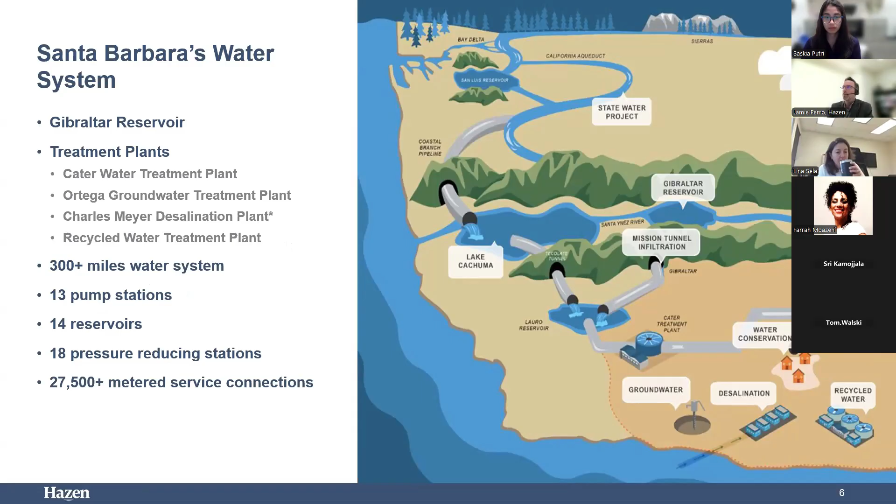So there's some complexities there. But they also have a recycled water treatment plant, which is what that picture I shared with you at the beginning, the El Estero Water Reclamation Center. They manage 300 miles of water system, 13 pump stations, 14 reservoirs, pressure reducing valves, and over 27,000 metered service connections. So the master plan, this is just a brief overview of what we are working on with them.

And this is the key here I want to highlight: this is a 10-year plan with a 30-year outlook. So Santa Barbara has said, give us a list of energy capital projects to implement over the next 10 years while thinking about the next 30 years.

And had Douglas given you his presentation first, that concept would have had a little bit more context around it for today. I know you're all aware of this, but how do you predict what's going on in the energy sector, even in the next 10 years, much less the next 30?

What does that mean from a delivery perspective for a client? I'm an engineering consultant. We have to deliver recommendations, not just ideas. We have to say, go build this thing in the next few years. So how do I make sure that I'm not going to be looked at as a team 5 years, 10 years down the road, saying, why did they tell us to do that? So it's very tricky, and there's a lot of agencies in the neighborhood looking at how Santa Barbara is proceeding with this project and others.

So starting from the bottom, we started with an energy benchmark baseline. How and where are you using energy? What are the flexible load opportunities? What is that market potential energy cost? How do we leverage existing CIPs, as I mentioned in the beginning?

And then actually integrate it with capital improvement programs across the board and develop that 10-year energy plan, the Water Resources Energy Master Plan. You'll see that acronym from here on out, WREMP, which I don't really like, but that's okay. We had proposed some really robust energy and data visualization strategies, which would then lead us along this 30-year path to best practices throughout the organization, staff and partner engagement, and then long-term optimization.

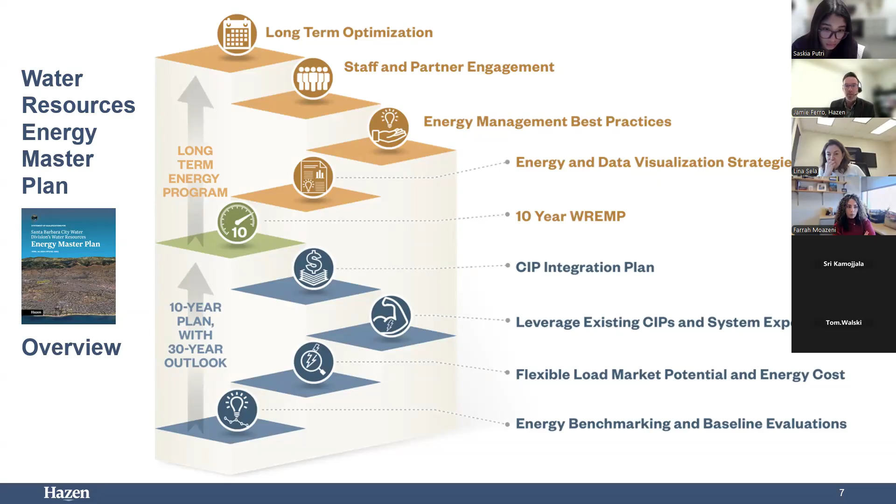So for 10 years, they've been exploring these opportunities from an academic perspective. They hired us, and this is actually the nexus of this, working with some of these researchers in an environment like this with Tom and Douglas in the Energy Management Committee of the AWWA. They reached out to us and said, can you help us develop a master plan around this energy? We've done all this research, now we want to implement. So that's where we're at.

The objectives are really simple. I want to walk through these 5 objectives: maximize financial and resilience benefits, expand renewable energy and battery energy storage systems — they've got some of these systems already — enhance energy resilience and reliability, integrate research initiatives, as I just mentioned, into their capital plans, and design an adaptive and dynamic plan.

And this is really one of those keys of meeting future uncertainties through this adaptive and dynamic nature. So the outcomes - I'll walk through briefly where we're at, and then we'll talk about some of the technical work.

Baseline energy use documentation - this is their first energy master plan, and they've done a lot of energy work, but really documenting where they are, where and how they use energy throughout this very complex system.

We then developed a Microsoft Power BI based dashboard for them to slice and dice the data, look historical, look at different rates, some counterfactuals about if we were on a different rate at this plant, how might that have affected overall cost in a period of time. At the moment, this is a static snapshot in time - basically taking that baseline information and putting it into a format where you can slice and dice, much how Power BI is intended to be used.

That's where it's at today. We're in the process of actually integrating some real-time upgrades into this dashboard right now, where they can regularly refresh the data and see near real-time energy use information throughout their system.

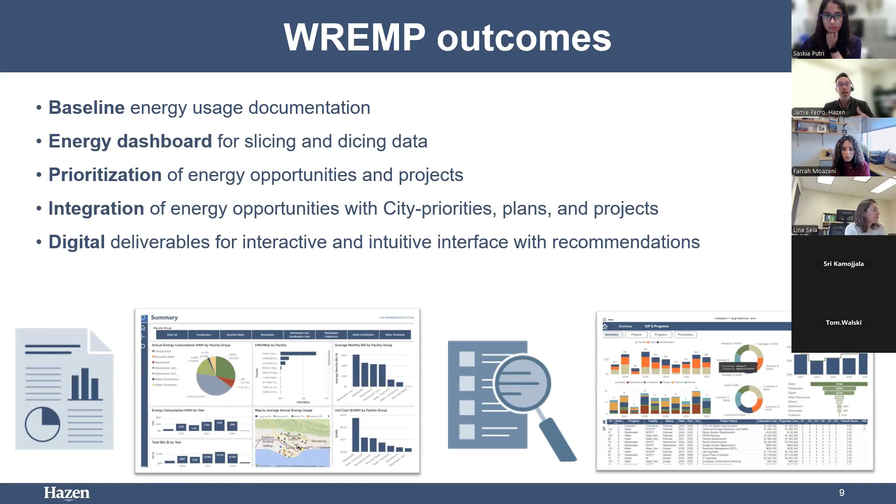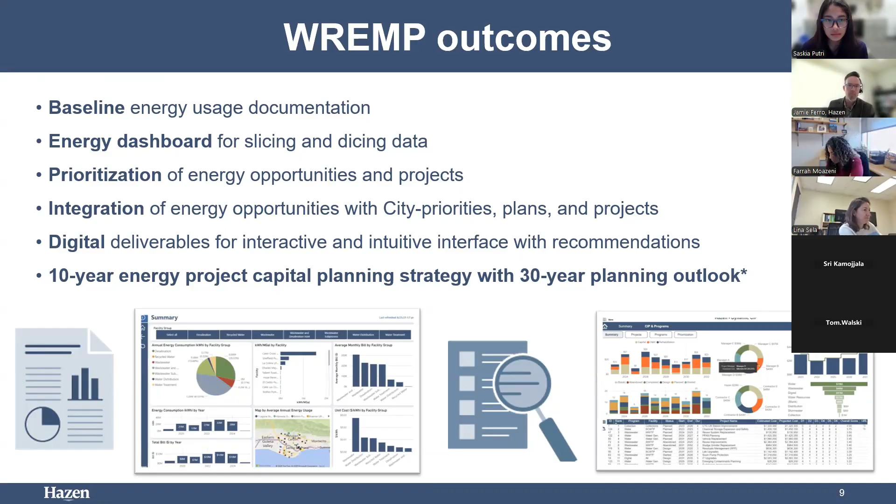I'll talk a little bit about that as I close up this case study. Ultimately, 10-year energy project planning strategy with a 30-year planning outlook - put an asterisk on there. We are in the last few months of wrapping up this entire plan, so we haven't quite given them that full deliverable yet. What are the projects we're looking at?

What are the priority opportunities? There's 87 individual energy projects that we have evaluated throughout the utility, ranging from energy efficiency projects, self-generation to load management strategies - 87, 86 projects. How do you prioritize those projects, and how do you make sure that you're really driving towards biggest bang for your buck implementation work?

We prioritize a couple of areas. The key here - you'll notice at the bottom right of my screen, the desal and the recycle water facility are on the same property, separated by a street, but on the same meter. So obviously there's a lot of opportunity there for load flexibility and coordinated operation of both desal and water resources recovery facility.

Coordinate the use of those, optimize the performance of the batteries that are on the system. We need to separate the load from each of these two facilities, but how do you time when and how some of the implementation, some of the operations of each of these facilities actually pulls load from the grid.

And I'd like to just note that one of the researchers has just joined us. He's been really instrumental in supporting this client, this city, for many years in his role at Stanford. So hello, Akshay, hope you're doing well, man.

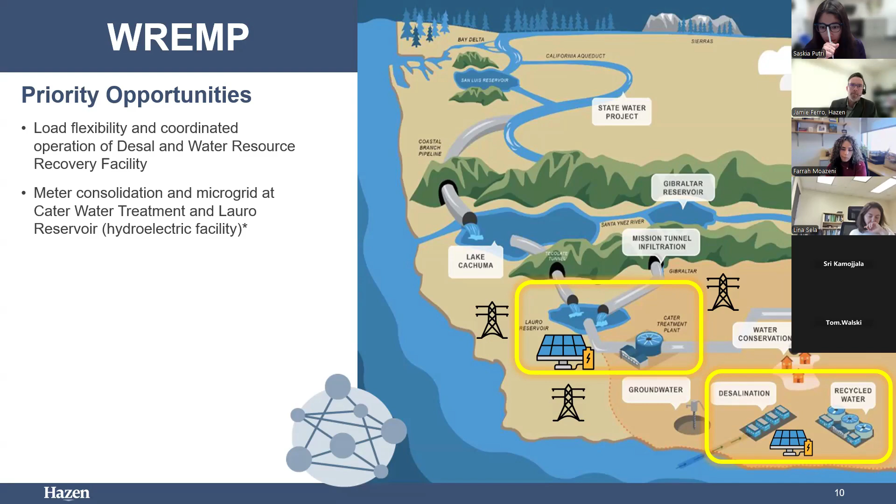So how do we think about all of these opportunities there, and really, do we consolidate all those meters into one? They've considered floating solar over the years. So really there's a big opportunity with this treatment system to optimize the performance of the system on the grid.

And then a couple other items at the wastewater treatment plant - a comprehensive biosolids and energy strategic plan. There's aeration improvements in there. And then piloting right now a wastewater influent equalization and secondary effluent return pump optimization strategy - that is a mouthful, I didn't realize that one bullet was going to be so hard to say.

The idea is thinking about when you can't really control what comes into a wastewater plant, and when you can. In this case, we've seen a lot of water conservation in the area, so they have very high strength sewage, but actually quite a bit of capacity within their system hydraulically.

So what we're working on with them right now is how do you use that water system, from a loading perspective, to manage the load, not the hydraulics, and use the hydraulics of the system as essentially a thermal battery. We could time some of those recirculation strategies.

We can actually back up the collection system while keeping that sewage fresh through mixing and bioaugmentation strategies, and figure out when is that load going to hit the blowers, which is where the real energy load at that treatment plant is. So we're working on some of those strategies, and how might that be coordinated with the battery or with the other existing loads on site?

The final piece of work really has come out of years of Stanford research, focusing on targeted leak loss repair and pump sequencing reservoir control strategies. So if we know the energy intensity of the system, and we know that most water agencies, including Santa Barbara, are systematically repairing leaks in their system, where do we focus our efforts on existing leak repair strategies?

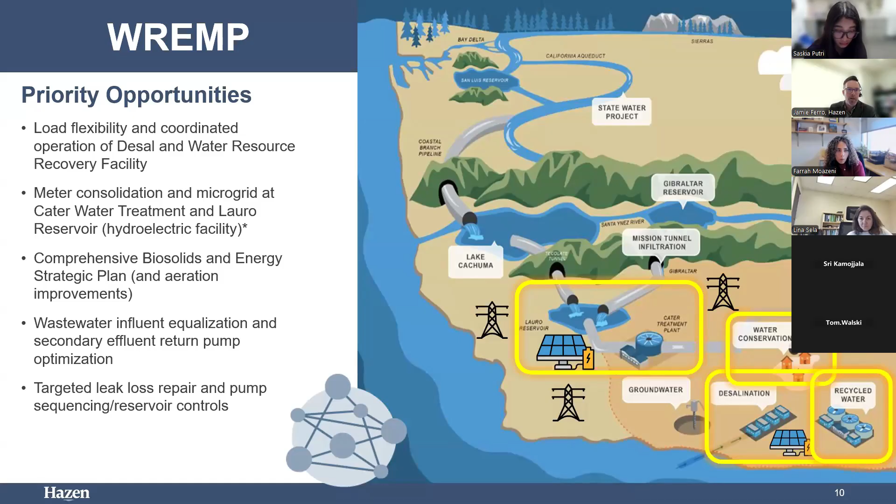Target those where you have high energy intensity and high flexibility, both in the pumping and the targeted leak repair. So we ended up presenting this multi-criteria decision analysis framework where for each project, we could think about the economics, the return on investment of an energy project just from a financial perspective, but there's other non-monetary benefits to each one of these projects.

So we developed this criteria ranking strategy where you've got different scores for each of these criteria, and then a weighting that is attached to each one of these criteria, so that each one of the utilities might have slightly different weights for the different criteria. And the goal is to score each one of these measures.

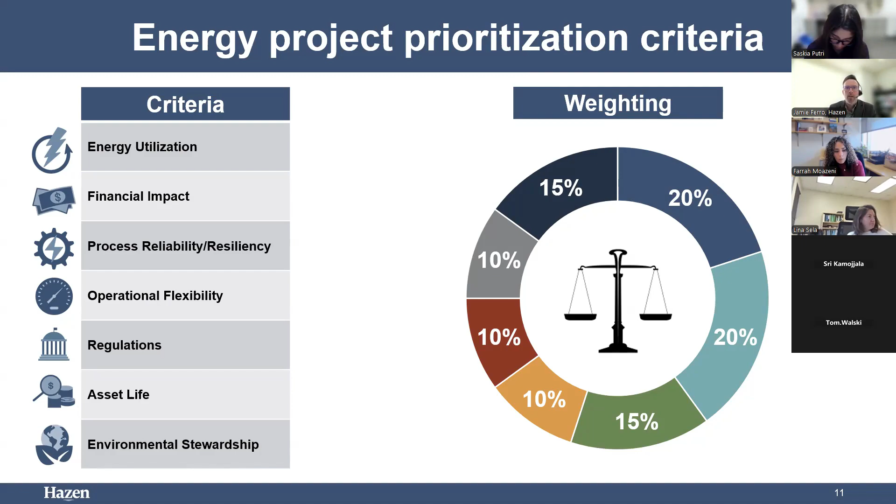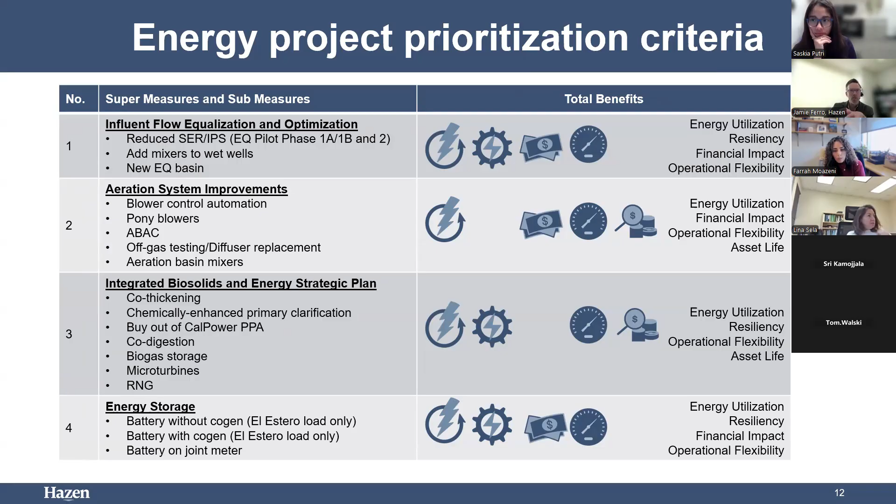So any of these capital priorities may have a very significant impact on energy use and time of use of energy and the grid. And so we want to make sure that we are working together with the city to time the implementation of these strategies in a way that really makes these projects make the most sense.

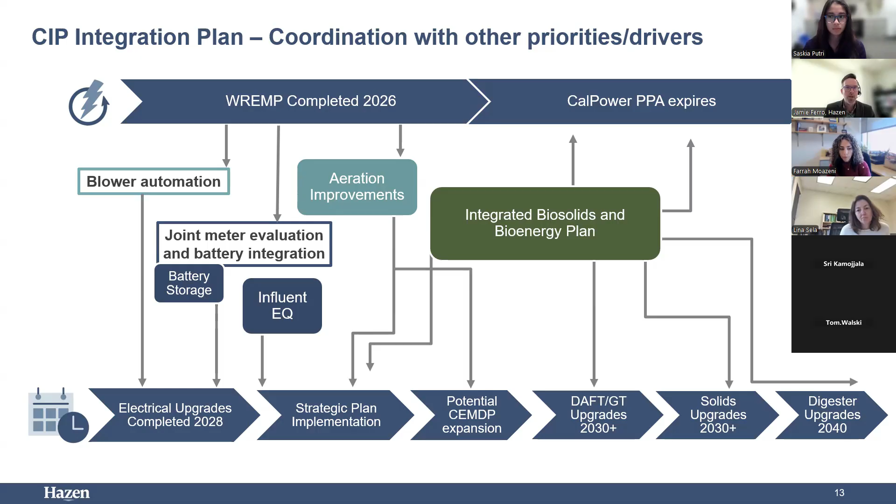At the end of the day, do we deliver a big document that can sit on a desk or on a bookshelf and collect cobwebs? Typically, this is how our industry has delivered energy master plans. Even the word master plan is out of fashion these days.

We have transitioned to calling them energy management plans instead of energy master plans. But traditionally, a master plan is a big document with all the technical memos and all the ideas. And the moment you publish it, just like a new car, you drive it off the lot, it loses value because the real-time conditions are changing all around us.

Our approach is to develop an integrated energy plan that ties all of these things together, considers these external factors, and ultimately delivers an actionable, intuitive roadmap of how these projects and capital priorities fit together. So that was the Santa Barbara case study, right on time.

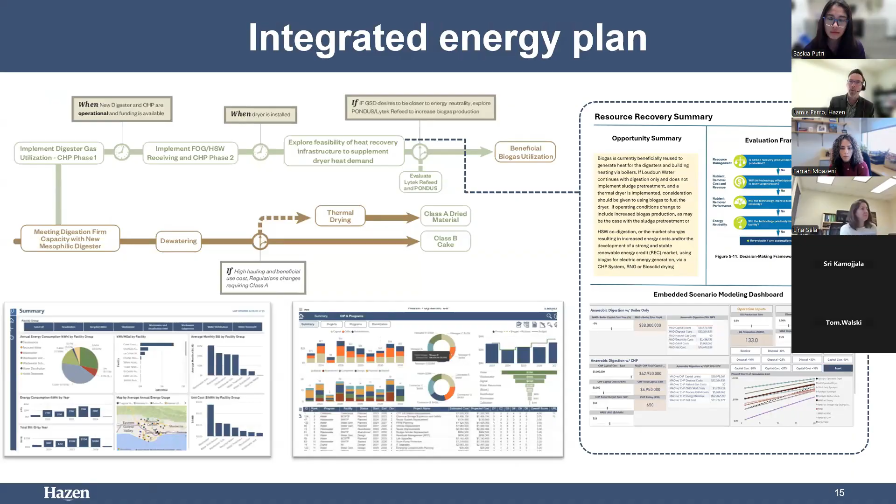I've got about 15 minutes to jump into the next case study, and hopefully we'll be able to get Douglas to give us that overarching context, and then we can have some discussions about these projects.

South Coast Water District here in my neighborhood. This is actually near and dear to my heart. I've known about this project for over 15 years. This project has been on the books, contemplated for nearly 27 years.

I'll give you a brief overview of the project, talk about some of the challenges. We'll describe the energy requirements, the energy intensity requirements of this desal system, talk about the opportunities, and I think I'll leave you with a couple of resources.

It's worth noting, as I said at the beginning, this is a progressive design, build, own, operate, maintain procurement. We call that DBOOM. It's like a progressive design build with a few other tweaks to it. So the Doheny Desal partners will actually own and operate this system, financed by the public utility, for a period of 20 years, until we transfer that ownership back over to South Coast Water District and their partners. So there's lots riding on this project, and a lot of risk sharing between this progressive design build strategy with the client.

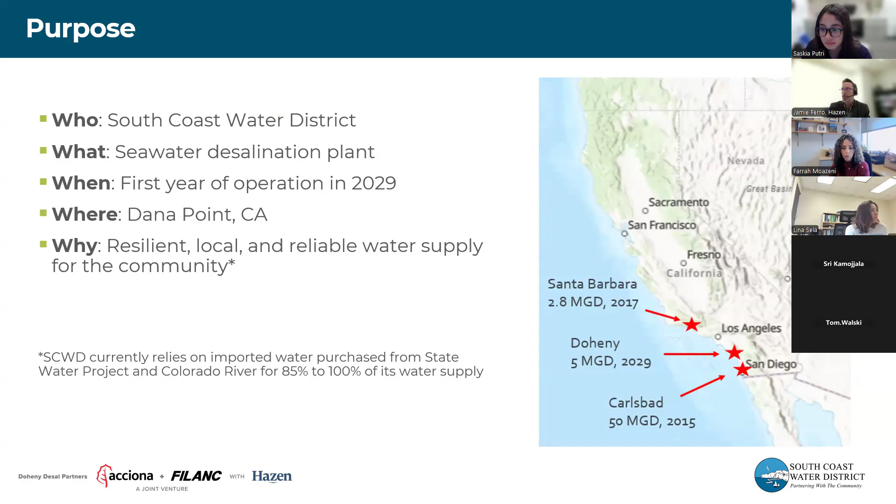The challenges we face on this project are pretty significant. As you know, desal is very energy intensive, you have to push water through a membrane. At the same time, the California Coastal Commission has put a special condition on issuing the coastal zone permit: the energy supply must be net carbon neutral.

Wow, that's going to be a tough one in that area, and I'll show you the site a little bit. The site is very constrained. We can't build a bunch of solar, we can't build a bunch of battery banks on site. We will, as you'll see, we have designed those solutions, but we can't offset the entire load on site.

The grid is constrained as well in the area. So it is not feasible, or economically feasible, to import power from distant solar farms, utility scale solar farms, or wind farms in Idaho, because that will not provide a resilient backup power supply source when there's interruptions in the grid. That would not accomplish the resilience goals that the project aims to achieve.

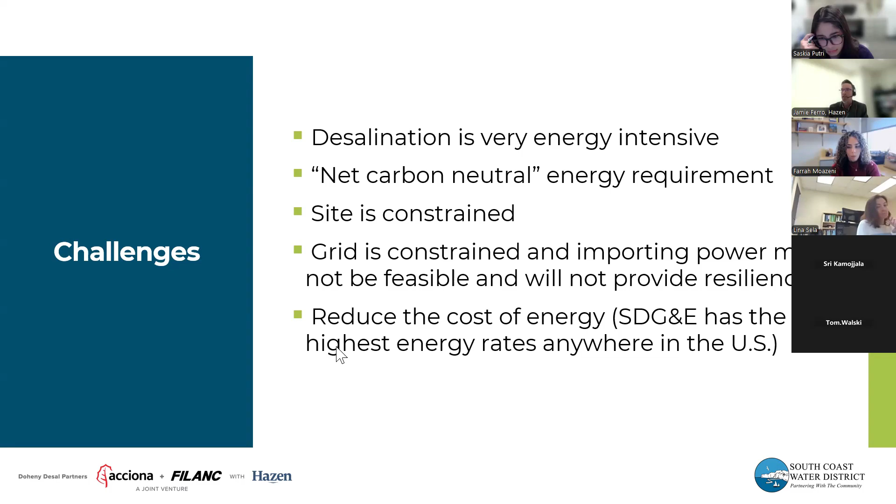And reducing the cost of energy is a major driver. SDG&E, the utility in the area, has the highest energy rates anywhere in the United States, and it's not looking like it's going down anytime soon.

The sustainability pillars, and I use that term sustainability, the Coastal Commission didn't, of this project are really fourfold. So it's just worth introducing these four concepts briefly besides the energy ones. This is that reliable local water supply.

The Coastal Commission has also required an ocean intake slant well. So the water will be pulled from below, it's subsurface ocean groundwaters, not directly pulling water from the ocean with benthic intake and marine life impacts. It actually is drawing ocean groundwater, which is a little bit less salty and has some other constituents in it, but it is still salt water, and it is very energy intensive, with less environmental impacts from the intake.

And then the outfall, the RO concentrate, is actually blended with the neighboring agency's wastewater discharge, again minimizing the impacts of the ocean discharge to the environment.

And finally, the net carbon neutral energy supply requirement—the California Coastal Commission staff is still waffling a little bit on what the actual definition of that requirement means, but we will work our way through that over the next few months and years.

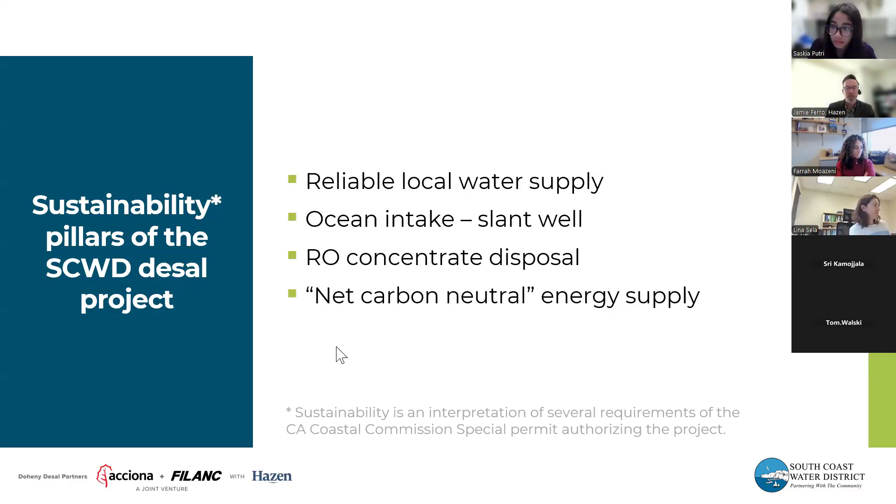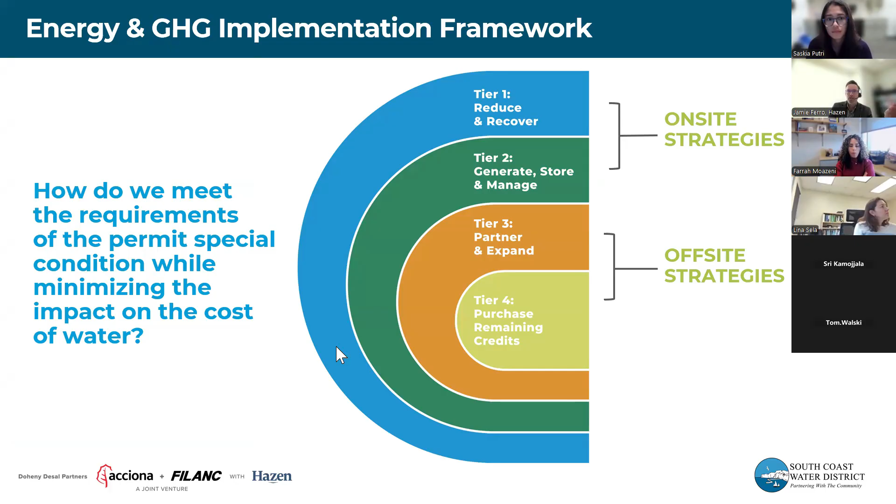The question we were asked is how do we meet the requirements of the special condition while minimizing the impact on the cost of water? We developed a four-tier strategy with on-site and off-site elements, and I'll talk about each and how we manage this load within the constraints of the grid.

The energy usage is pretty significant. We're looking at 28 million kilowatt hours a year, almost 29. Total power installed is 4.1 megawatts, with peak demand of 3.8 megawatts.

We're looking at estimated energy cost, assuming 100% grid power, of about $7.3 million. Carbon offsets to meet the net carbon neutral energy supply requirement would be about $320,000, and the estimated cost of energy if we just receive power from SDG&E is about 26.5 cents a kilowatt hour. That's important because a solar project, even with a battery system, can compete pretty well against a baseline of 26.5 cents a kilowatt hour. So that's working in our benefit.

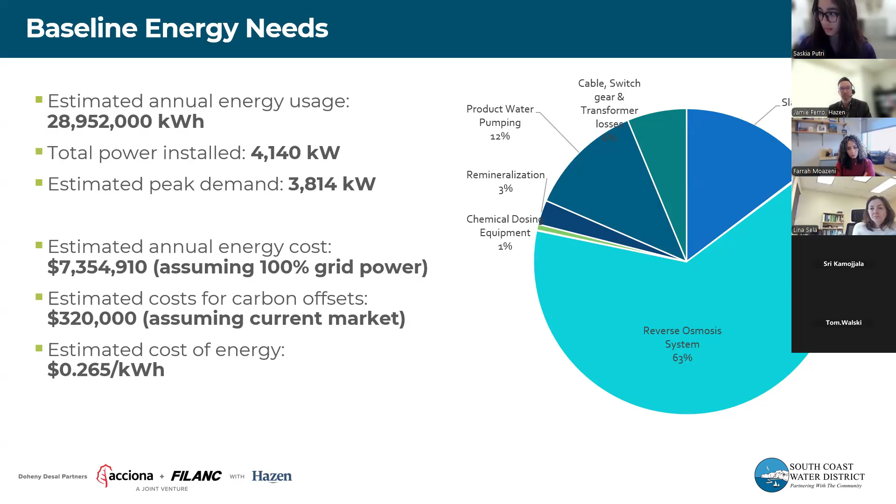But at the end of the day, this project will not move forward if we cannot lower those energy costs below about 20 cents per kilowatt hour. Actually, we think we need to get closer to 17 cents a kilowatt hour. So I'm going to talk to you about our journey to get there.

Tier one really focuses on site: let's reduce the amount of energy that we need for the system, and recover as much energy as possible. Ultimately, the goal is to minimize the purchase power from SDG&E.

We've got all the typical desal facility strategies you might imagine: energy load management, thinking about when and how we use energy; energy efficiency; design flexibility with both the pretreatment system and VFDs throughout all the pumping loops within the plant; and variable production schedules to make sure we minimize any of those time-of-use charges.

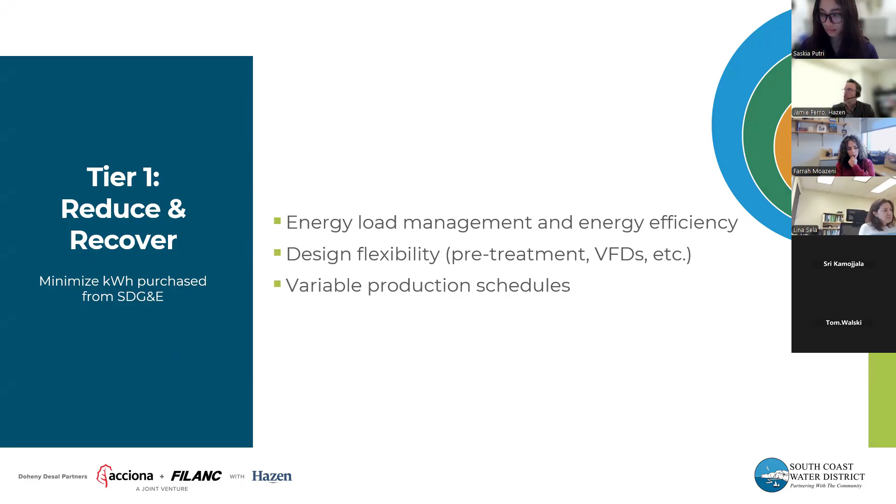On-site energy efficiency includes energy recovery devices—standard issue within any desal facility, but they capture a lot of that hydraulic energy. When you pressurize these RO vessels, what do you do with that pressure? Capture it, return that pressure back into the feed loop, so you don't have to continually blow off pressurized water and pressurized energy. Using VFDs and slant wells is also a pretty standard energy efficiency tactic for the site.

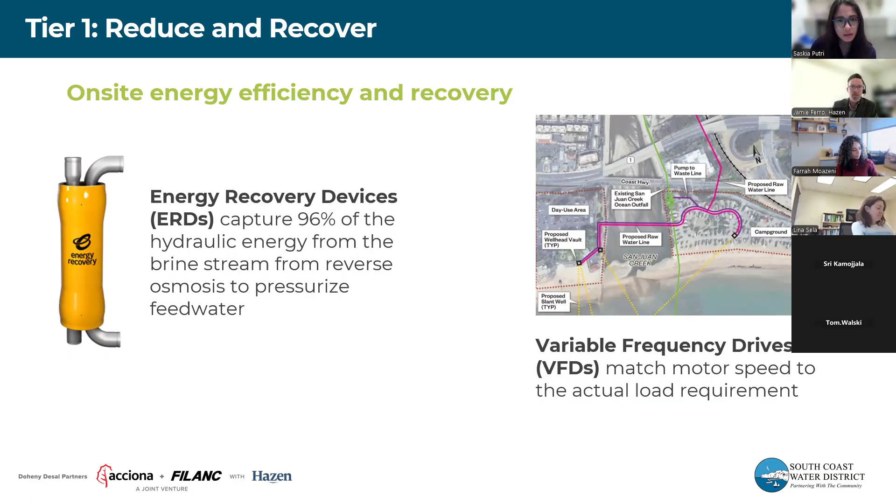Tier two is where things get exciting, and that's where I'd like to spend the majority of the last few minutes in this case study. We've envisioned a microgrid, and I'll talk a little bit about the elements of that strategy here.

The first priority is to maximize the use and value of solar and battery storage—once you've purchased those assets, the solar's free, no fuel required. Priority two is to offset electricity purchases with lower-cost natural gas. A secondary benefit would be integrating all these on-site strategies with our standby power strategy.

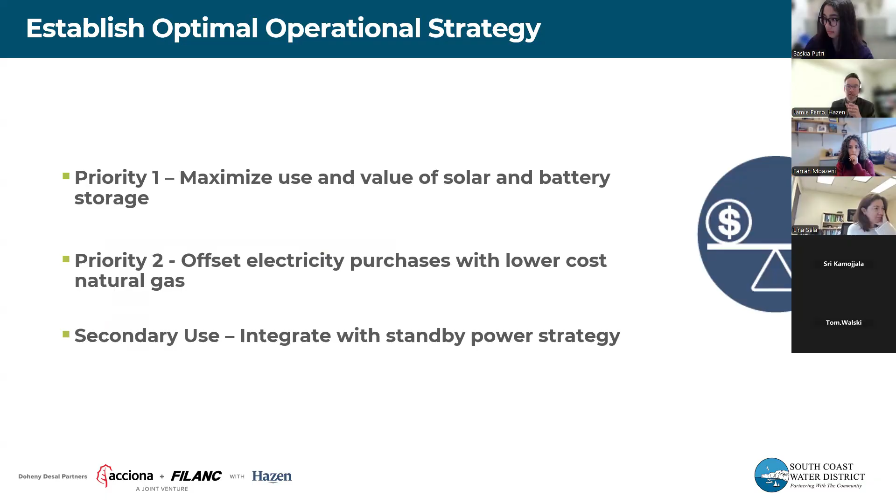There was envisioned a 4 megawatt diesel generator on site for power interruptions, and we've been able to avoid actually purchasing that diesel generator to offset the emergency standby requirements here.

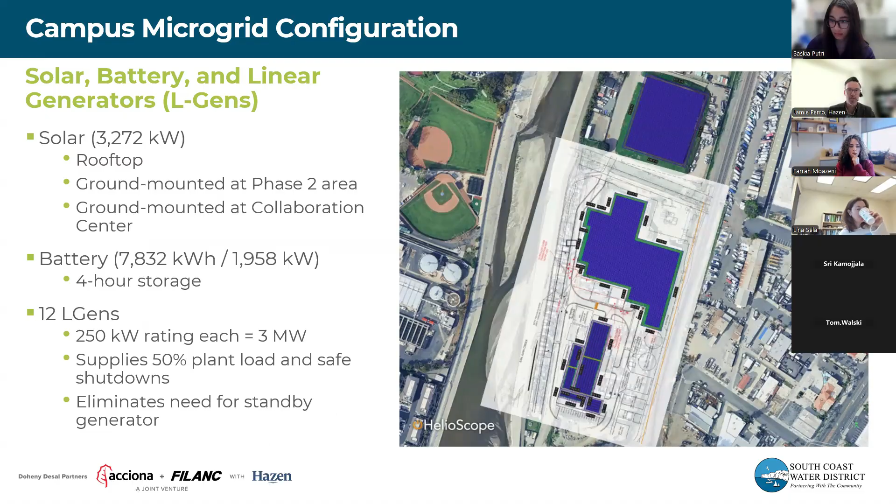We've got about 3.2 megawatts of rooftop and ground-mounted solar, a 2 megawatt 4-hour battery storage system, and 12 linear generators envisioned for the project as it stands today. These linear generators are rated 250 kW each, so about 3 megawatts of linear generators total. That will supply 50% of the load and provide for safe shutdowns during power outages, and as I mentioned, it eliminates the need for a standby generator—not an insignificant strategy from a resilience and cost-effectiveness point of view.

The 3.25 megawatts of solar and battery is estimated to provide about $1.2 million of annual savings for the facility. So that in itself is really a big benefit to the project.

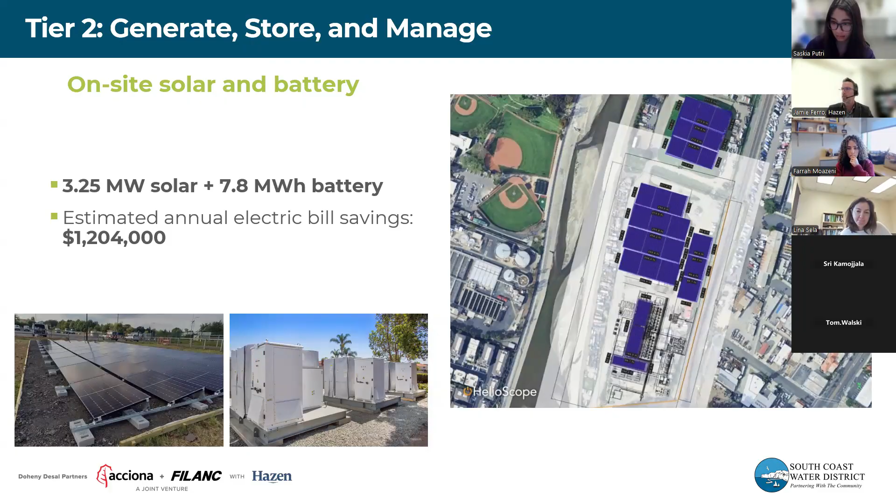We don't have a lot of room, but we've used as much of the footprint as possible, and all of the buildings where possible in the desal facility are designed with roof-mounted facilities. The linear generators, if you haven't heard, are quite a significant innovative technology that's really getting a lot of traction in our industry—this is state-of-the-art.

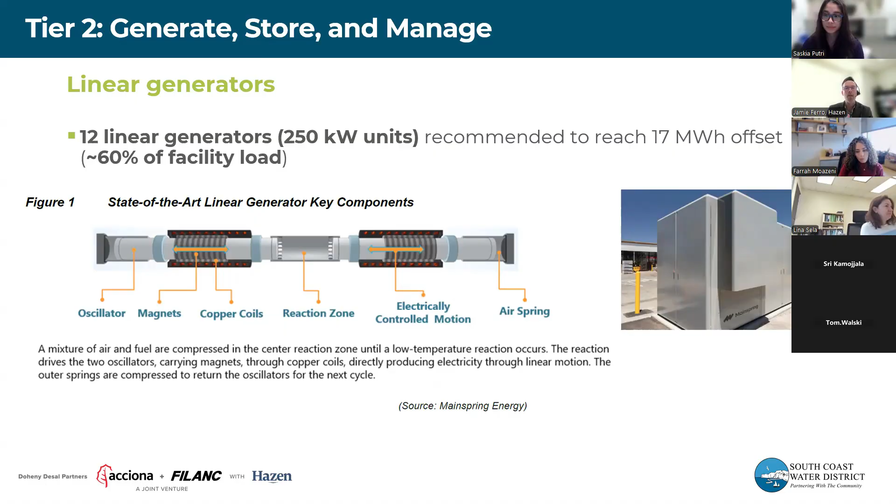Basically, it's a gas generator with few moving parts. It's fuel agnostic—you can switch between natural gas, renewable natural gas, biogas, hydrogen in the future, could even run on ammonia. So it's a very high efficiency conversion of natural gas to electricity, with few moving parts. It also provided us redundancy—if the grid goes down, it's not likely that the electricity grid and the natural gas grid go down at the same time. So we have a lot of interesting redundancy and opportunities to optimize there.

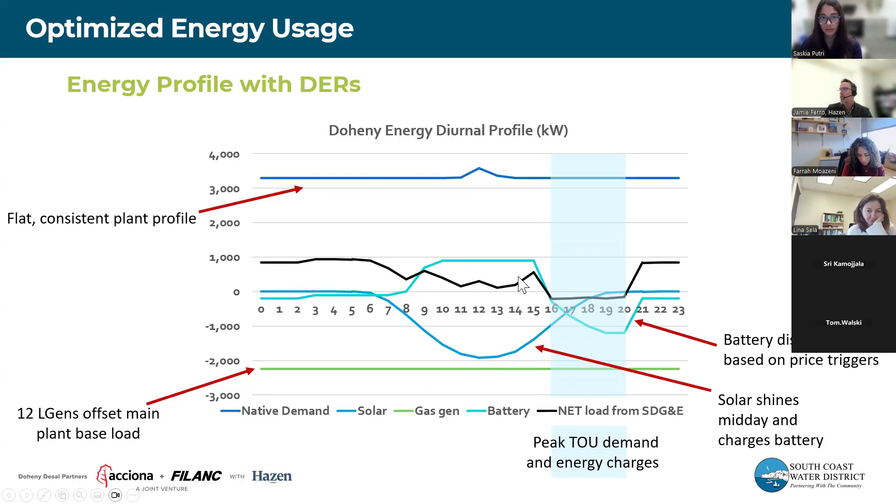This bottom green line is the 12 linear generators, which will offset as a base load—about 2 megawatts of that base load. Then you could see the dark blue line that dips here—that's the solar reducing the load from the grid. And the light blue line here is the batteries discharging. What's left over, this black line, is what we're actually purchasing from the local electric utility.

The last interesting piece I'll share here is the slant wells that are off-site. We're actually electrically connecting those slant wells to the main load at the desal facility so that we can take advantage of all of the renewable energy and the natural gas linear generator energy to supply that slant well load at an offsite facility.

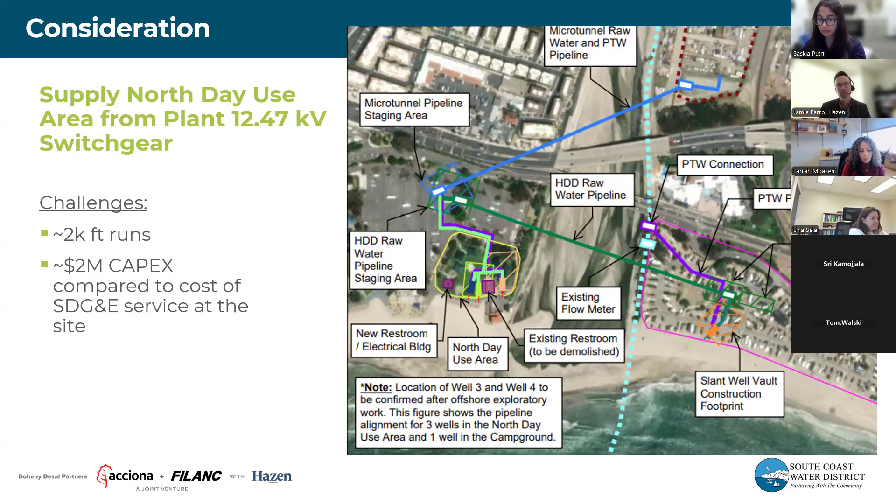So while we're connecting the facilities, obviously you need to pump the ocean water up to the treatment plant through that same master tunnel—we call it the micro tunnel pipeline. We have run two 6-inch conduits to feed medium voltage power to that switch gear at the pump stations so that we don't have to run a separate utility source to that pump station. There's three 350 horsepower motors on the beach there and another one on standby—quite a significant load that can be powered by that desal facility energy infrastructure, which is about 2,000 feet away.

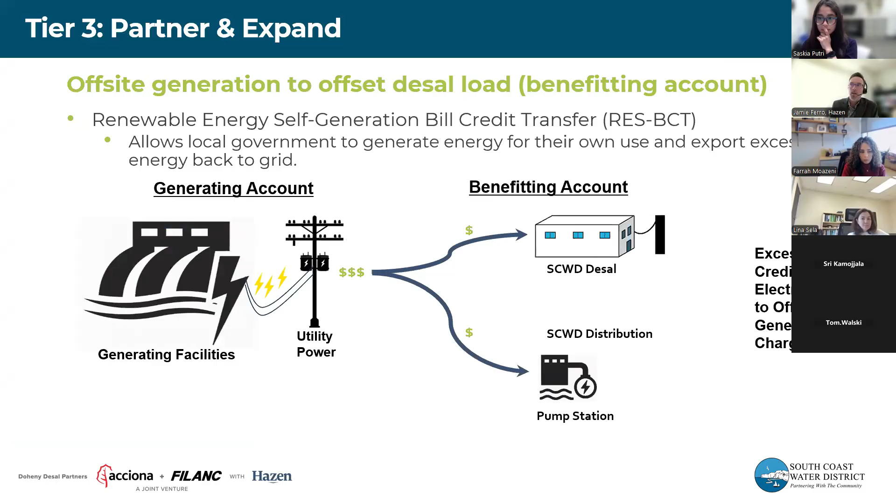The last piece I'll touch on in closing is, as I mentioned, those linear generators are fuel agnostic. We had envisioned some other solar facilities, battery facilities at reservoirs and admin buildings, pump stations throughout the service area, maybe even some inline power opportunities and working with some of those partner agencies on some of these strategies. But the real opportunity comes with the landfill gas. The neighboring agency, the Orange County Waste and Recycling, runs a landfill which is only about 8 miles away from the desal facility, and there are some natural gas pipelines in the area.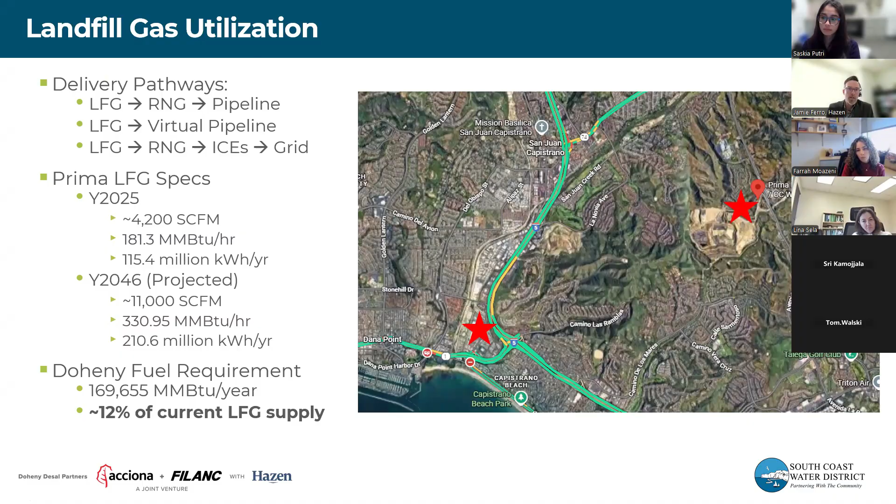We've considered a variety of landfill gas to RNG, renewable natural gas into the pipeline. We've actually considered virtual pipeline strategies of trucking landfill gas down to the plant. Ultimately, in several years, when this landfill gas is available, we'll transition the natural gas in the linear generators over to landfill gas, continuing to reduce the cost of operating and reduce the need to buy some of those carbon credits to offset the natural gas load.

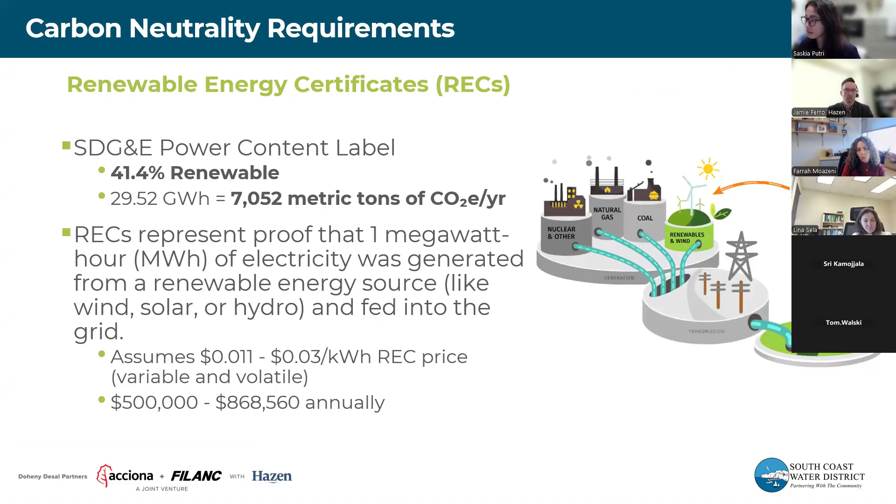So the final piece here is purchasing those carbon credits. Again, we have to purchase somewhere between $500,000 and $860,000 of carbon credits if we were just buying all the power from the utility. That is a really important driver—figuring out how to minimize the purchases of RECs.

So an 11-year simple payback return on investment is not a bad deal. The overall project's about $250 million, so we're adding a not insignificant amount of capital. But to accomplish these goals, we're recommending that the agency moves forward with a capital improvement instead of some public-private partnerships leasing some of this equipment.

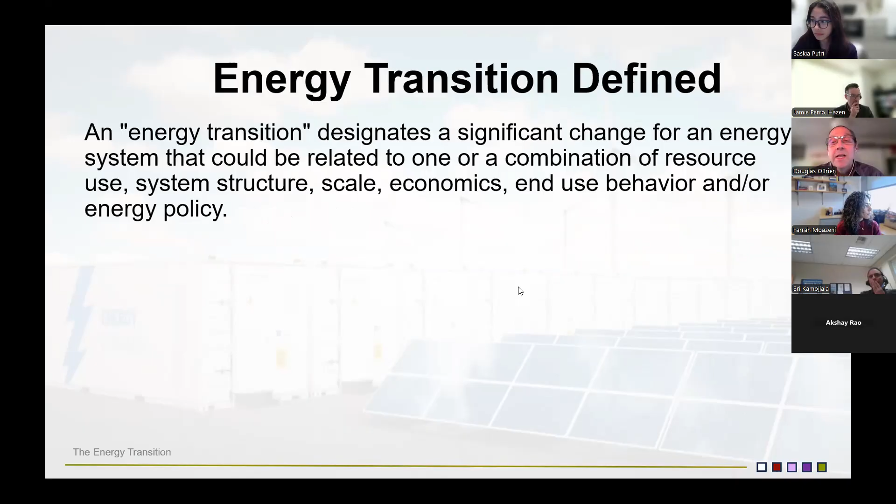The definition here is a pretty standard one, but how we use and interact with energy is dependent on the direct energy source that's available. Throughout history, we have continued to expand the range of energy resources that we use. Every expansion has been accompanied with technological developments that enable us to effectively utilize the energy resource. Consider the ox and the plow, the coal and the steam engine, petroleum and the internal combustion engine.

Each energy transition marked a significant transformation of human society. It's a transition.

Am I even here? Oh, I dropped off. Can you still hear me, Douglas? Okay, the slide is still there. Can you tap again on this slide, Saskia? This is what I have. What am I looking at here? All right, there we go. You know what, I can't see where you are. Let me fix something here.

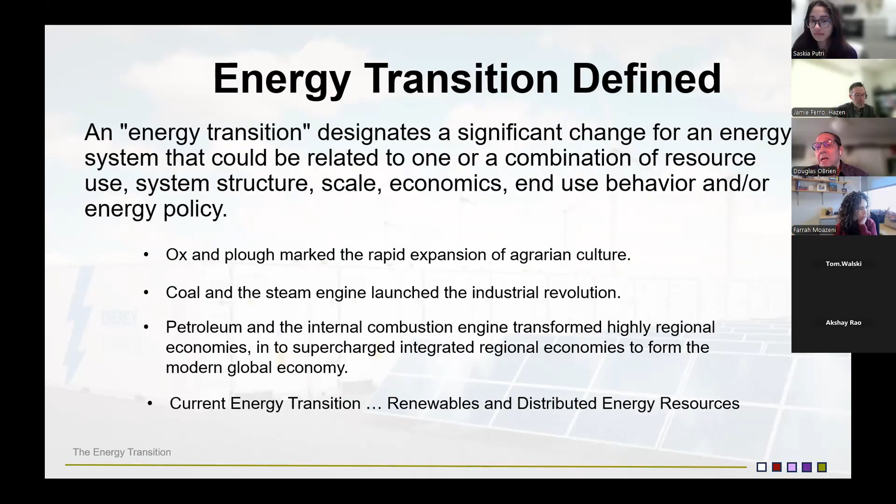Recently, you may have heard that the energy transition is not happening or it's stalled, and the evidence pointed to support such a notion is that the use of oil has continued to increase over the last decade. And this is true, but it's not the whole picture.

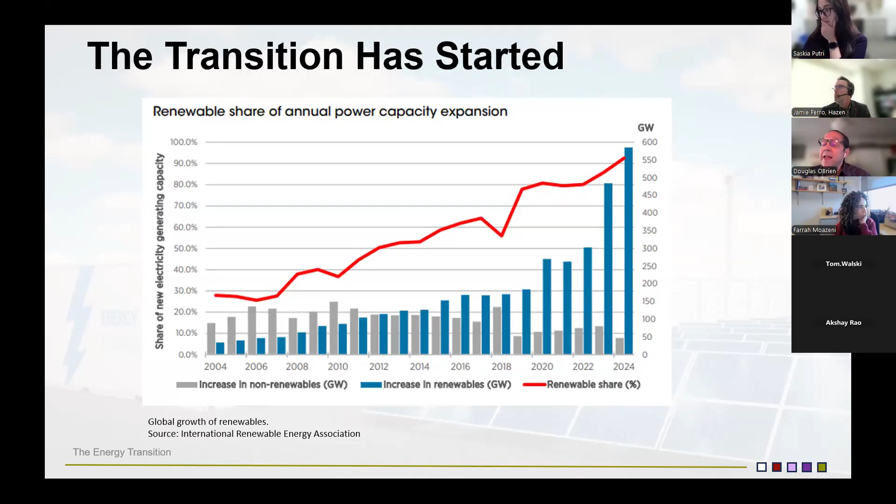This slide is a global representation of the new energy resources that are coming online. As you can see, there's a steady decline of the fossil fuel assets that are coming on each year, and a steady increase of renewable generation.

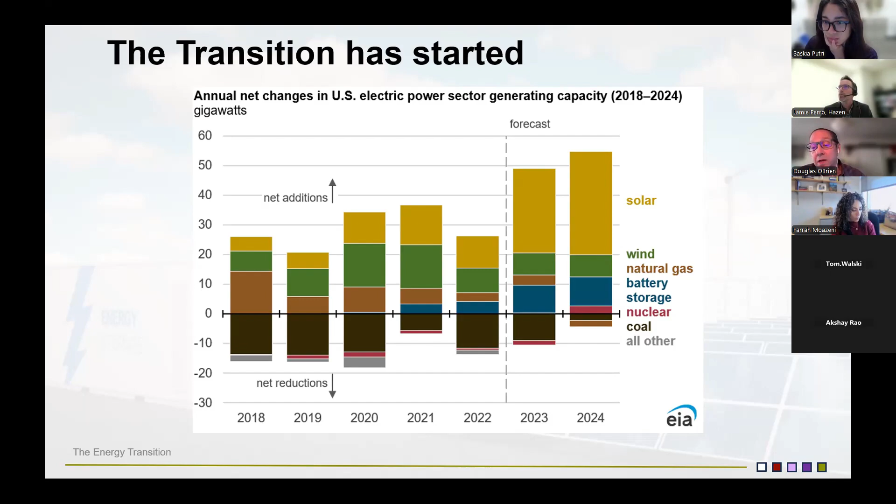Since 2021, it has been less expensive to build a new renewable and battery facility than it is to build a new gas generation plant. Based on the fact that gas prices are likely to be going up over the next 5 to 10 years, we will soon see that it's less expensive to build a new renewable and battery facility than it is to even continue to run an existing gas plant.

To help you appreciate just how significant the current trends are, I want to share some of the most telling comments made by Darren Woods, CEO of ExxonMobil. The CEO of the largest fossil fuel company in the world has said that by 2040, all new passenger vehicles sold worldwide would be electric. Now, given the headwinds here in the United States, we might need to modify this and say that by 2040, all new cars will be electric, except for North America and perhaps Europe. But what's more important is he even indicated directly that as we move into the next decade or so, their product will no longer be primarily focused on energy, and that their product as an energy resource is going to be in decline. They're going to pivot and focus more on the other products that gas and oil can provide, like fertilizer and plastics.

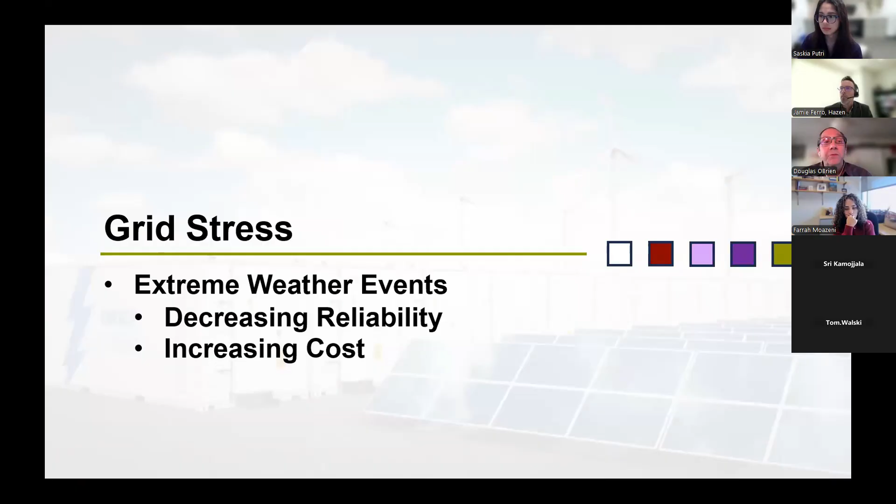The electric transmission and distribution system are not immune to this devastation. You may be accustomed to hearing that renewables are the reason for the majority of the cost increases, and this is false. Right now, most of the increases you're seeing in your electric bill are costs incurred to recover from climate disaster and the grid hardening work that has to come afterwards. One of the really disturbing things that's come to light is the disaster recovery industry is now making up 3% of our gross domestic product, and Wall Street has taken notice and is investing heavily in those industries.

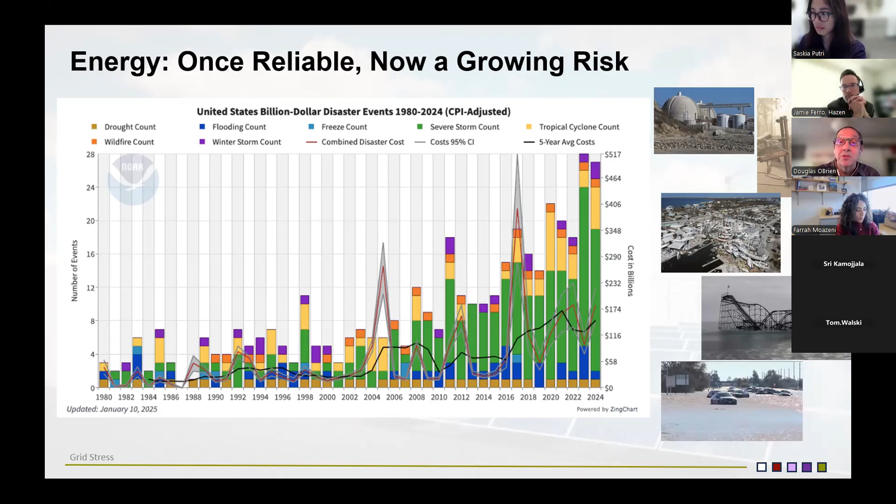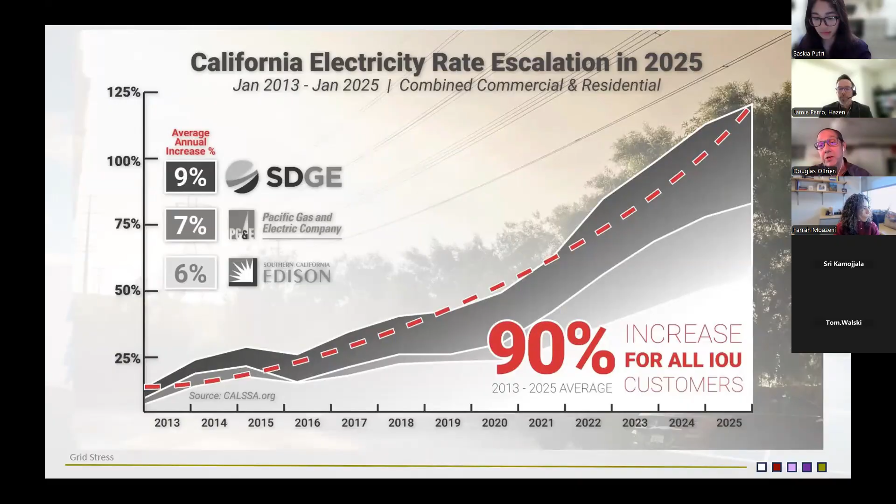I chose California to show the trend of rapid rate increases from 2013 to present because they're sort of the poster child. I didn't want to use the average trend across the country because it really doesn't tell you what's going on. The reality is that depending upon where you are in the country will determine what your rates are and how fast those rates are escalating.

But most of these rate increases are due to climate impacts. But there's also the other side, which we're now going to move on to, which is demand growth.

So there are multiple dimensions to demand growth that the water facility needs to consider. There's the grid-wide demand growth, there's local circuit substation demand growth and capacity limits, and then there's the facility demand growth.

So on the national level, we've got the move to electrify everything. We've got reindustrialization efforts, EV and EV charging infrastructure, and, of course, data centers. And at the local level, water demand growth for advanced water treatment and nutrient removal.

Whenever there is demand growth, there is a reasonable expectation that for the short to medium term there will be some price increase and then the prices will retreat. But it's also true that when the expansion comes, prices for energy can go down. In fact, a recent report by Lawrence Berkeley National Labs has shown that grid scale renewable deployed via market incentives has actually lowered the energy cost component on your bill. But the same report states very clearly that similar outcomes in the future are not guaranteed, and the reason is that investor-owned utilities have a strong incentive to meet demand growth in the most expensive way they can find. For them, expensive, big capital projects mean more profit.

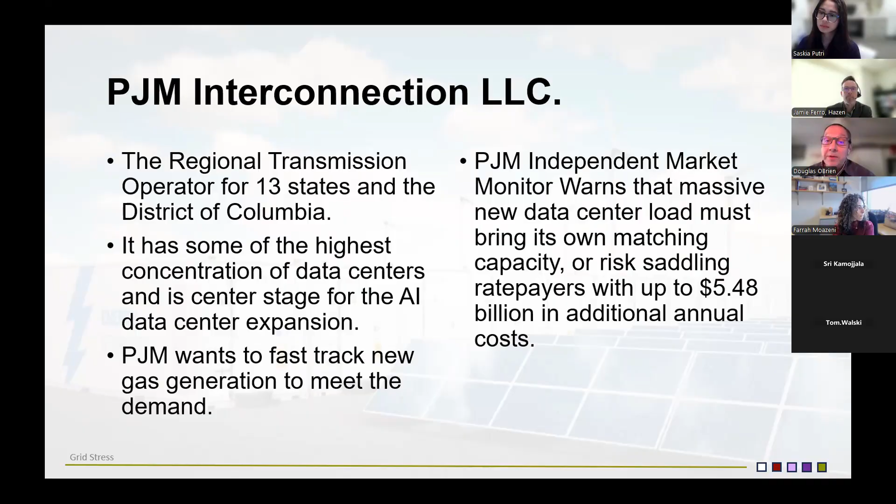Even PJM's own market monitor has warned that if we don't make the new loads pay for the rate increases, it's all going to fall on the ratepayer, to the tune of some $5.48 billion in just their territory alone. Now, the irony—go to the next slide.

The irony is, right now sitting in the queue waiting for an interconnection pathway is 2.5 terawatts of new generation. Most of that is a combination of wind and solar combined with batteries. That's twice the amount of capacity our entire grid currently has. So think about that—we've got 2 times what we currently deliver to the grid waiting to connect, and the connection process has been stymied again because of the vertical integration and control these large corporations have over the regulatory process.

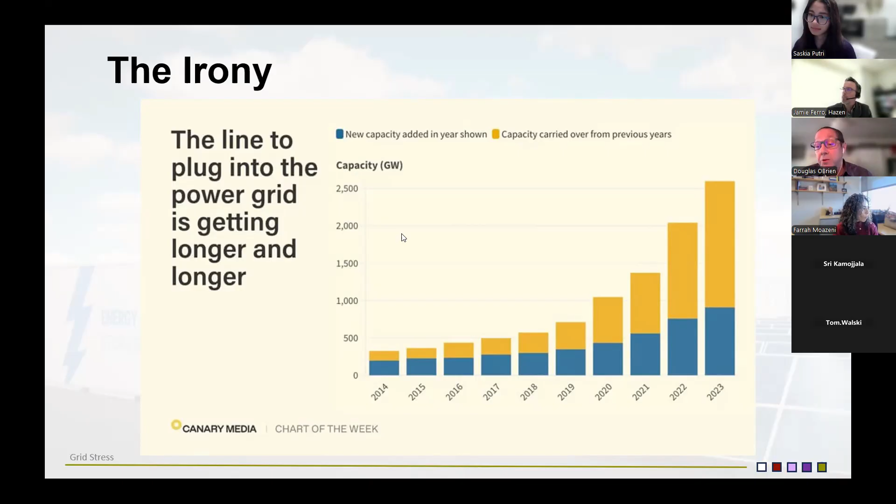Next slide. So I'll talk a little bit about distributed energy resources. I'm sure many of you are familiar with it, but I just want to cover the ground about what they're all about and how they've had an impact on our grid infrastructure.

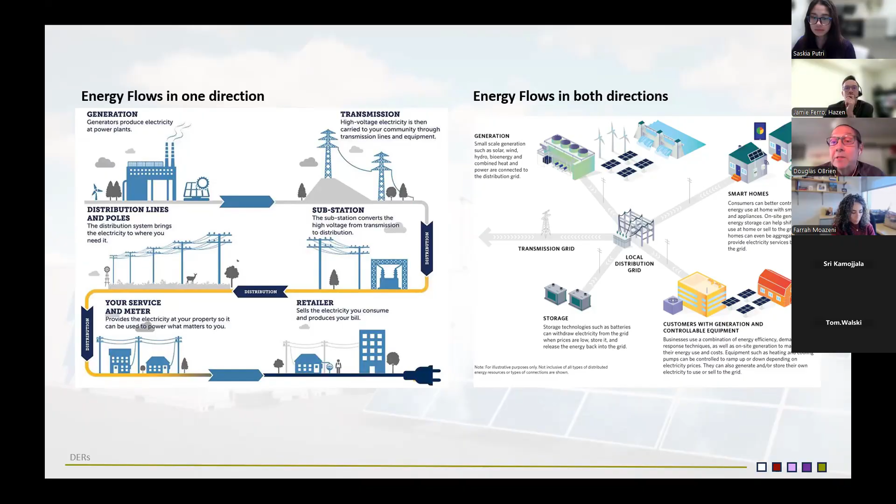Next slide. So the federal government has recognized the vital role that distributed energy resources are going to play in the energy transition, particularly for providing resilience and, in the long term, a substantial contribution to reliability. They also recognize that without substantial incentives and new market rules, it's going to be hard for DERs to scale up. So the federal government established FERC Order 2222, which does two things.

First, it defines what distributed energy resources are, and that list includes energy efficiency and demand response, which is a very enlightened position for them to take. Those are energy management practices that water facilities already have experience with. The order also mandates that DERs must be allowed to participate in the energy markets on a level playing field and be fairly compensated for the services they provide to the grid.

Water and wastewater facilities, due to their load profile, have a great opportunity to participate in this market structure. Any investment made in building energy infrastructure now will provide real economic benefits in the future. Next slide.

So I just want to emphasize again, I'm not just saying this—there's lots of evidence and research demonstrating that renewable energy has become the least expensive alternative for new energy infrastructure, whether on the bulk grid, the distribution system in front of the meter, or behind the meter. And DERs are the best investment to provide resilience, mitigate against the impacts of extreme climate events, and control energy costs. Next slide.

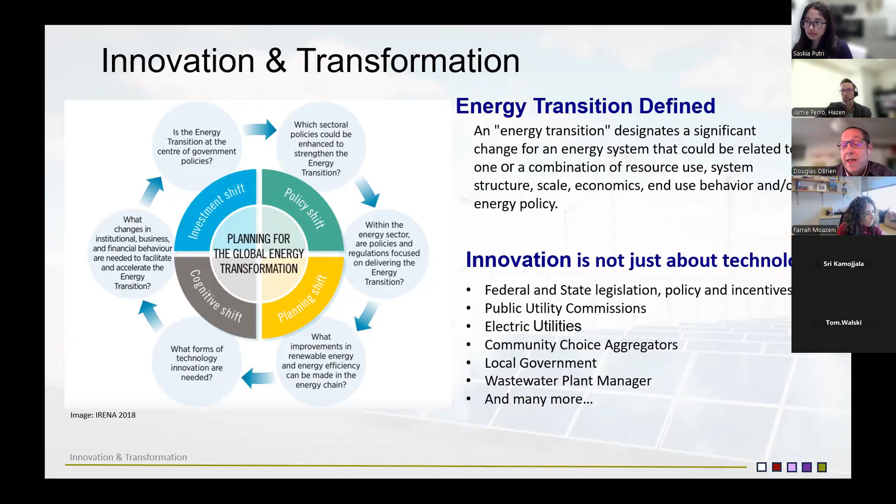But I want you to consider — when I first did this version of the presentation, I cited several initiatives that were going on. Peninsula Clean Energy announced a couple of years ago that they were going to have 100% clean energy for their whole constituent base, and that they'd get there by 2028. And they are on track for that. Another interesting one that popped up was Microsoft saying that they entered into an agreement to receive 50 megawatts of capacity from a fusion reactor in 2028.

And they're not the only ones looking at this right now. So it sounds like sustained fusion energy has been achieved, and we're just waiting for them to set up the fuel supply system so they can actually turn these generators on and make them run.

But another one that I pointed out was that GM said by 2028, they would have the cost of a battery down to $85 a kilowatt hour. And I immediately thought to myself, that's amazing. I have 2 Tesla Powerwalls, and for the batteries alone, not the inverter and not the gateway, but the batteries, it was $7,500. Now, at $85 a kilowatt hour, you can get those two Tesla Powerwalls for the price of a high-end refrigerator.

But now here we are, where CATL, a Chinese battery manufacturer, has announced that their sodium-ion batteries are currently at $19 a kilowatt hour, and they expect to get that down to 10. So again, for just the batteries, not some of the hardware and installation costs, at $20, that's $540 for two Tesla Powerwalls, and at $10, that's $270. I want to emphasize it's going to take some time for those prices to actually be available in our market for stationary storage for home use, but it's going to make batteries a household appliance.

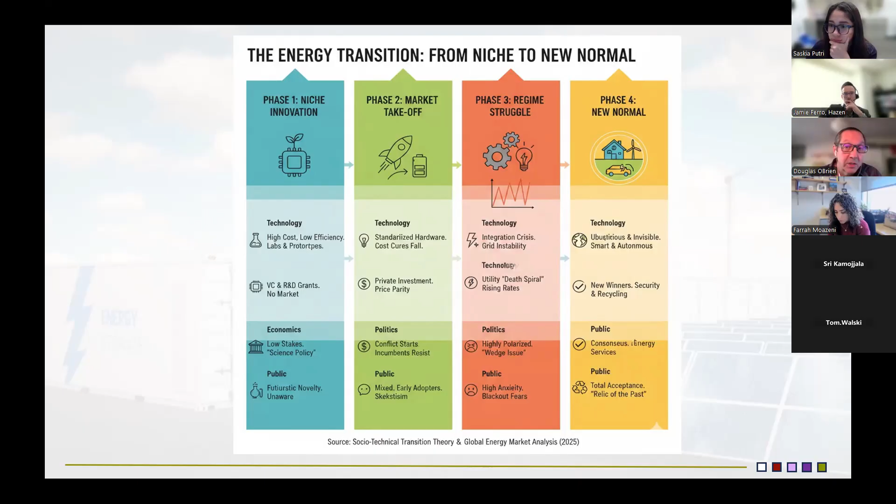All right, let's move on to the next slide. So the case for DERs and Advanced Energy Resource Management and Planning.

Next, I had AI generate this. Did a pretty good job, maybe a little overkill. You can see here that, based on everything I've said, we are in a crisis. There are increased constraints on the grid, higher costs, less reliability, and water and wastewater facilities really need to have a paradigm shift in the way they think about energy.

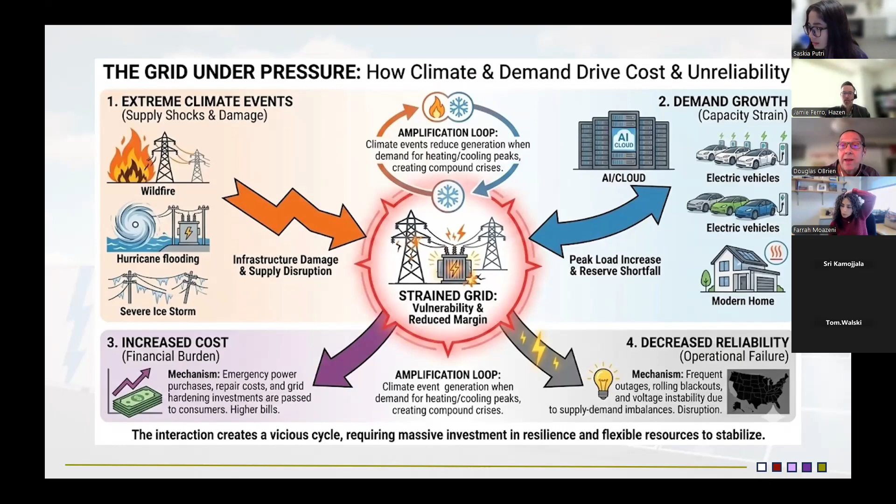Next slide, tap forward once. So when Jamie and I were working at West Yost Associates, we were introduced to a concept called cyber-informed engineering. It basically says, for water agencies, you can't just assume that your IT guys are going to provide you with cybersecurity. Go ahead and tap forward.

You have to accept that the hackers are going to get in. They will get into the system. Operators must be able to quickly isolate the system from the hacker's control and be able to continue to operate the system. So this was a paradigm shift where they had to accept, all right, wait a minute, we can't just rely on IT to provide us a service. We've got to be prepared to take control of the system because the hackers are going to get in.

Well, when it comes to energy, I think there's a similar mind shift that needs to take place for a majority of the water operators. Now, Jamie was talking about what's going on here in California, and I think, again, California is kind of the poster child of what's going to happen to the rest of the country. And so a lot of the water operators here are kind of already into that curve. They're already seeing that they have to take more ownership and command of their energy resources.

So during one of the conversations Jamie and I were having while we were at West just about this topic, why don't you tap forward. I decided that I was going to co-opt that idea of cyber-informed engineering and come up with a framework for energy-informed engineering. And I won't bother reading through this. I'll let us get into questions. But Jamie's presentation is basically a roadmap on how you can use the principles of energy-informed engineering and integrate advanced energy management and energy resource planning into your capital design.

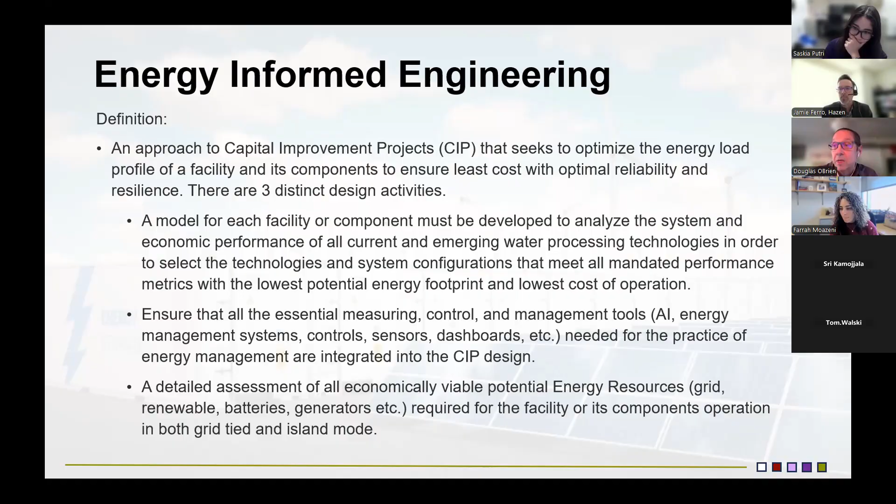I know that Jamie has a quick, hard stop. So I don't know, Jamie, do you have 1 minute or no? Yeah, have to 2 minutes. Yeah, no problem. There are really two questions for you in the chat. Okay, go for it. I don't see them, but yeah.

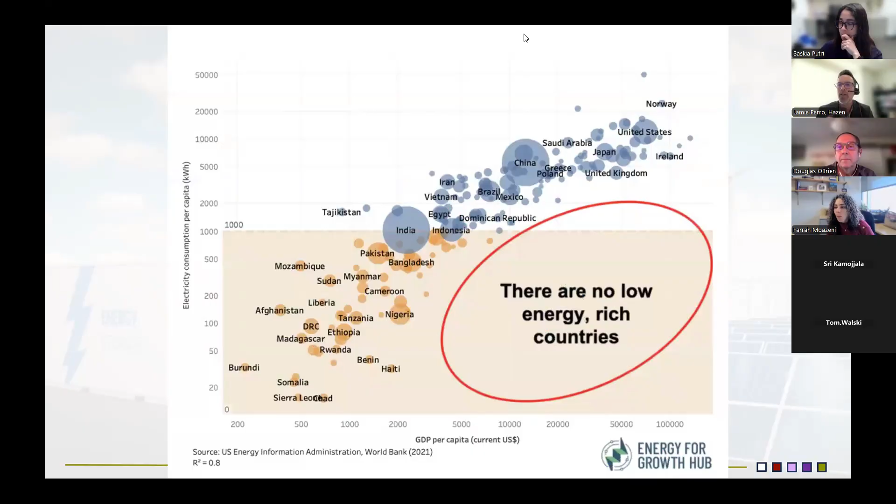So given the high risk of wildfires, does the master plan specifically account for the fire flow demands and the infrastructure required to support them?

Absolutely, that's job number one, making sure they can keep the water flowing. We have some pump stations where we're contemplating batteries, out by the water treatment facility. There are some pump stations that provide fire flow, so they've already got backup batteries there.

Great question. The second question is, how is the water conservation policy structured? Is it mandatory enforcement that regulates both the utility's distribution efficiency and the community's end use? That's a great question, I don't have all the details on their policy. There were some state regulations that required agencies to back off to realize savings, but ultimately it's voluntary with price triggers, so you have budget-based rate structures all through California, where if you use too much outdoor or indoor water, you get penalized for it.

Before you go, thank you so much for your presentation. It was a very constructive discussion. Hopefully we can talk more about this.

Yeah, really sorry you guys, I wish I could stick around and talk longer, but I have a client meeting I need to get to. Sorry about the logistic issues. Thank you so much. Douglas, thank you, man. Bye everybody, welcome, bye Jamie. I can stay on a little longer if you don't mind.